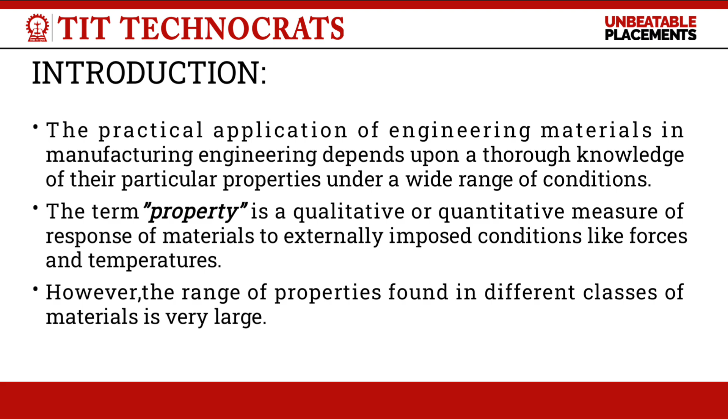Today we are going to study a very important topic, mechanical properties of engineering material. In engineering, selecting the right material is extremely important because every material behaves differently under different load and conditions. Understanding these properties helps us in design, manufacturing and analysis.

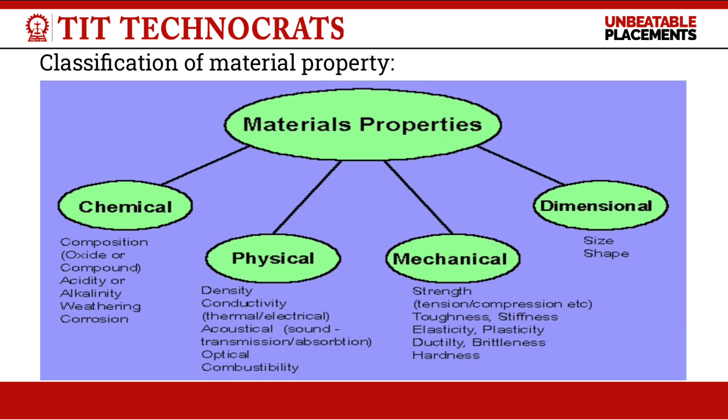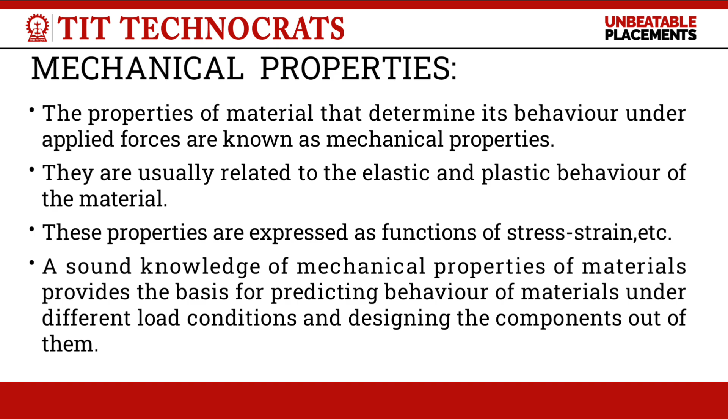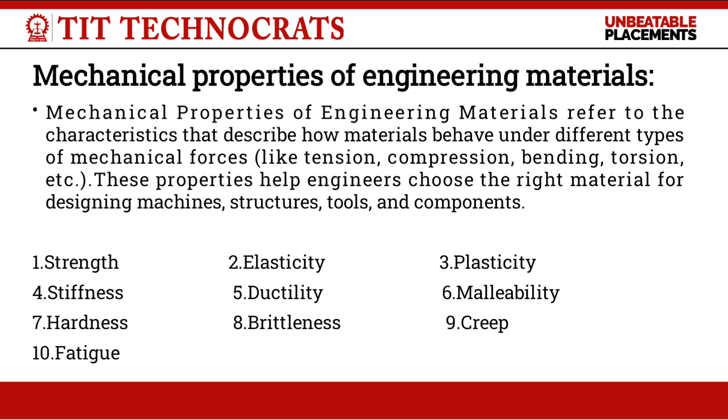What are the mechanical properties? Mechanical properties describe how a material behaves when force is applied. These properties help us understand whether a material will deform, bend, crack or break under load. Engineers use this knowledge to select the most suitable material for each application.

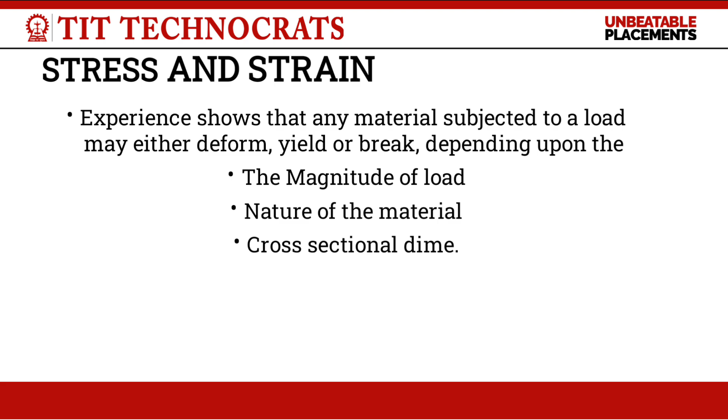Before learning individual properties, we must understand the basic concept of stress and strain. Stress is the internal resistance developed inside a material when external force is applied. The formula is stress equals force upon cross sectional area.

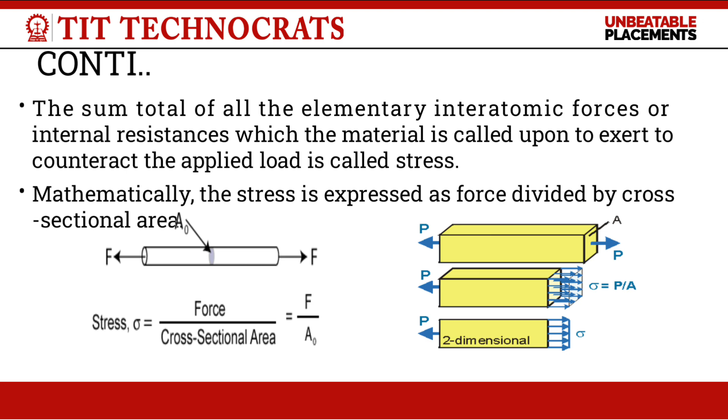Strain is the deformation produced in a material per unit length, and the formula is strain equals change in length upon original length. As the load increases, stress and strain also increase.

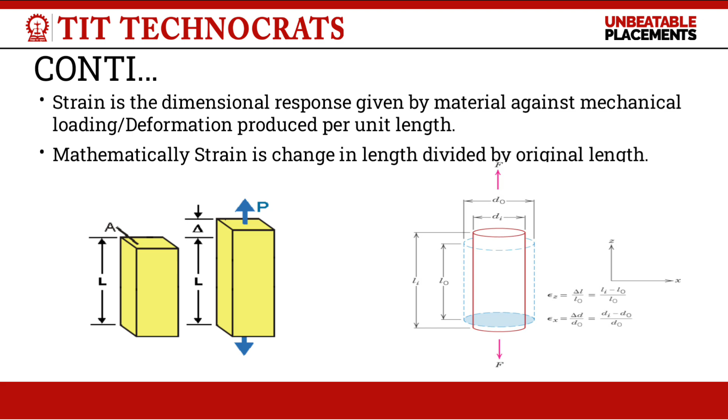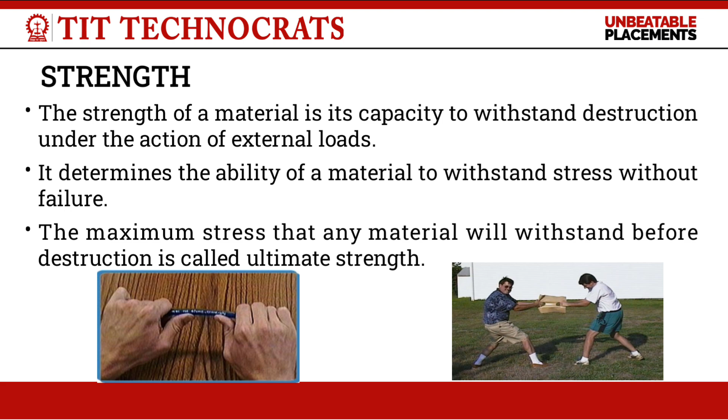Strength is the ability of material to withstand an applied load without failure. The maximum stress a material can bear before breaking is called ultimate strength.

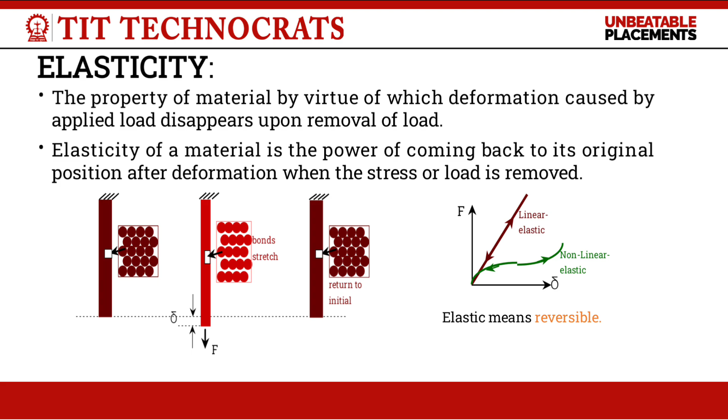Elasticity is the property of a material by which it returns to its original shape after the load is removed. This behavior is reversible. Materials like steel and rubber show good elasticity.

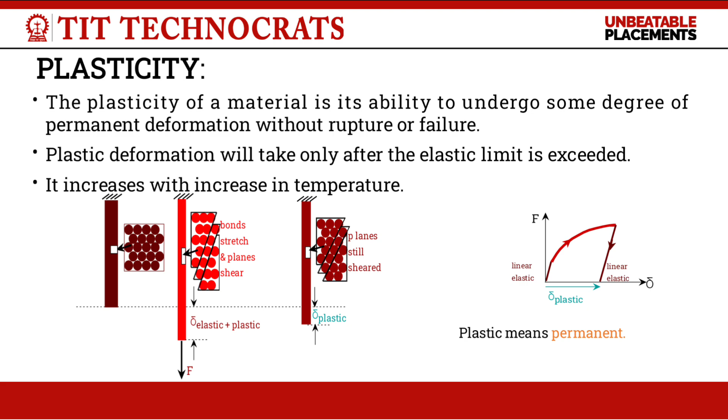Next property is plasticity. Plasticity is the ability of material to undergo permanent deformation without breaking. Plastic deformation begins only after the elastic limit is crossed. This property increases with temperature.

This is a stress strain curve, showing elasticity and plasticity for material. The stress strain curve shows both elastic and plastic behavior of material. Engineers use this curve to understand material behavior and to design safe components.

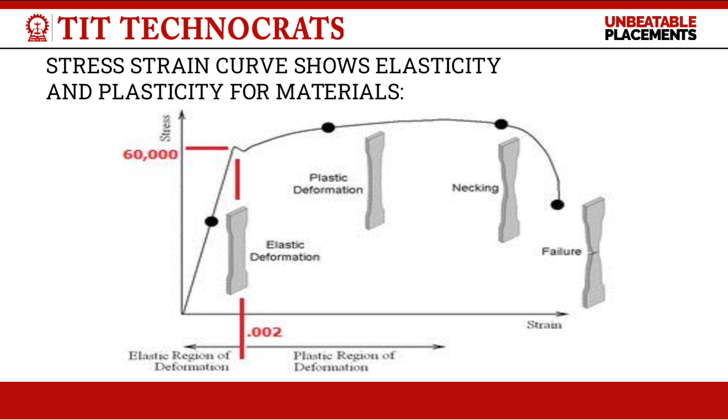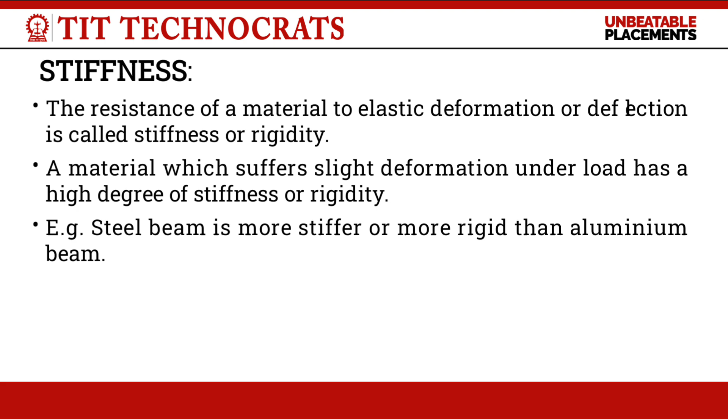Stiffness is the resistance of a material to elastic deformation. A material that deforms very little under load is said to be stiff. For example, steel beam is stiffer than an aluminum beam.

Ductility is an important property of the material. Ductility is the property by which a material can be drawn into thin wire. For example, mild steel is a highly ductile material. Percentage elongation is commonly used to measure ductility.

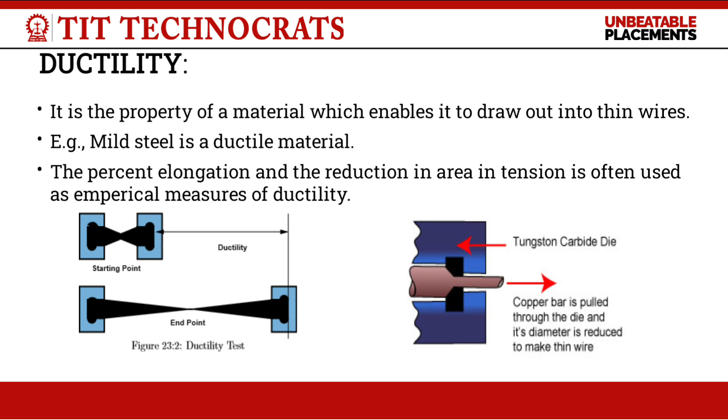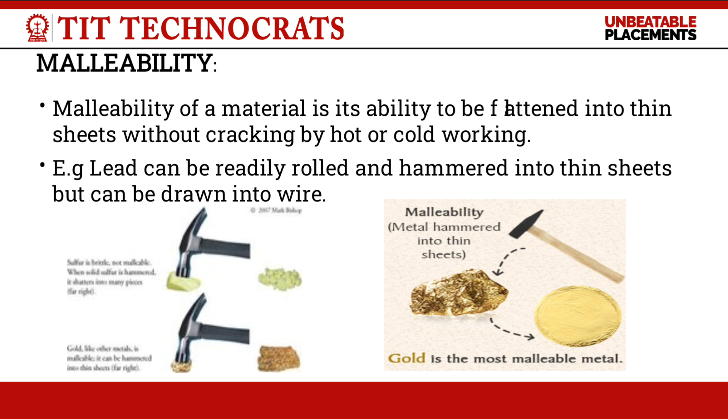Malleability is the ability of material to be hammered or rolled into thin sheet without cracking. Lead is a good example of a malleable material.

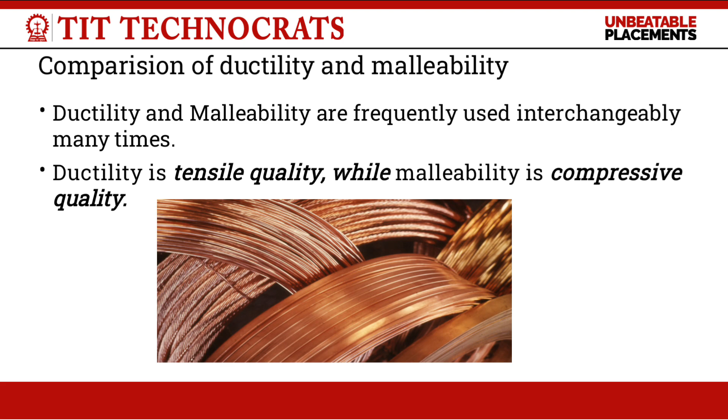Comparison between ductility and malleability: ductility is related to tensile load, the ability to form thin wire. Malleability is related to compressive load, the ability to form sheet. Both properties are different from each other.

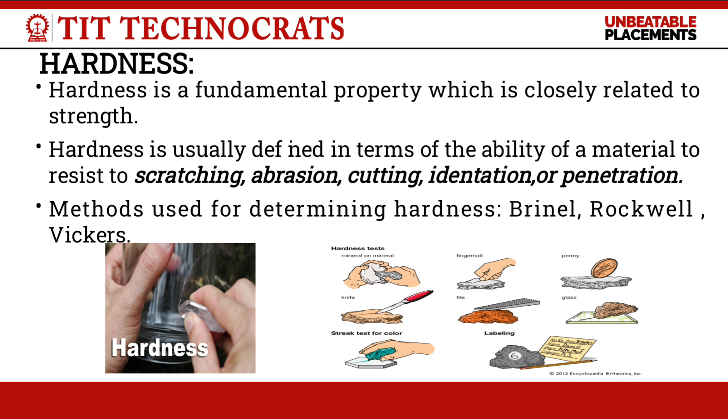Hardness is the ability of material to resist scratching, indentation, abrasion, or cutting. Common hardness testing methods used are Brinell test and Rockwell test.